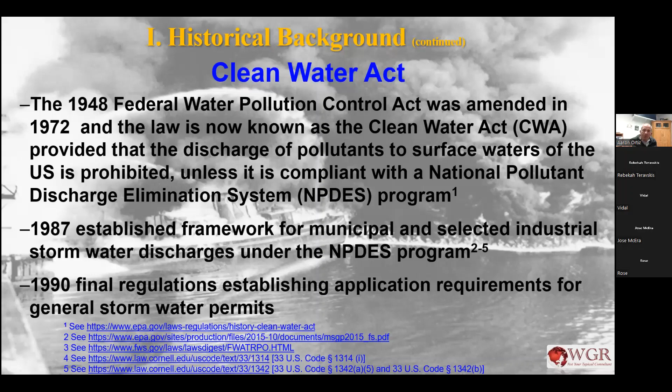If certain businesses' SIC code categorizes them as a business that needs to have coverage, you can't just let water leave. You have to put certain protections in place, and that's what this permit does. And it gives you general rules, okay? It doesn't say you specifically have to do sweeping 15 times a day or something like that. It says you have to do good housekeeping, and we'll go into that in a minute. But it gives you general rules, and from these general rules, you need to apply these, okay? And basically, the Clean Water Act allows for states to seek and get granted the ability to administer their own programs.

So that's why you say, wait a minute, this is a Clean Water Act. It's a federal Clean Water Act, but yet I'm under the California Industrial General Stormwater Permit. Why is that? Because California sought and got authority to administer the general permit program. So what we have now is a California-issued general permit that businesses that meet the criteria under the SIC code category are required to get coverage, and California has a right to administer it.

So it's a federal program, so it's a state program with federal backing, okay? And so back in '89, California received approval to administer this program. So the NPDES program created basically the permit that we're under now. And this permit requires you to create a document. So like I said, this is a general permit with general rules.

And now here's the thing that people don't understand. Many times when I see stormwater pollution prevention plans created, they basically just take the rules from the general permit, they stick them in their plan and say, here, we do good housekeeping. Well, kind of the whole point of the stormwater pollution prevention plan and monitoring plan is to say, here's how we are going to apply those general rules.

Because like I said, they don't say you have to sweep 15 times a day. They say you have to clean, you have to do good housekeeping. And then you tell them in your plan how you plan to keep that. It's a general permit, same permit for everybody. So let's get into the thing.

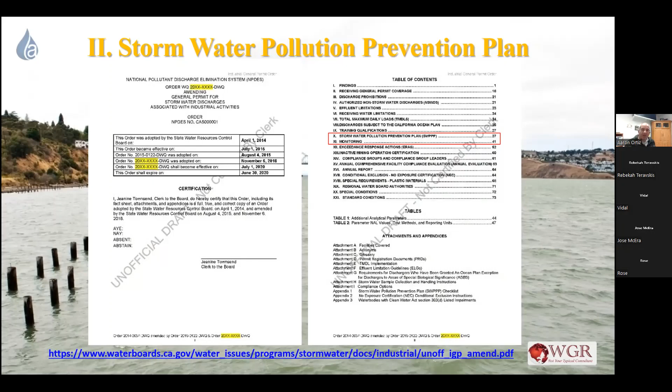But first, let's talk about what you're expected to do. So let's take a look at the first part. We're going to focus on section 10. Okay. So best management practices. If you haven't heard that term before, you will. It applies in many different sectors of business, but it's particularly important in terms of the industrial general stormwater permit, because here's the official definition as it's found in attachment C of the general permit.

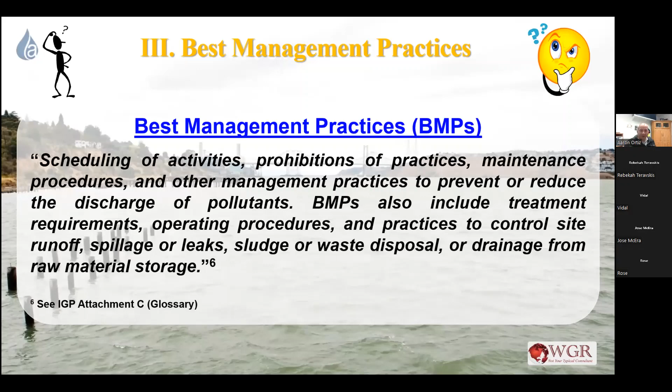Scheduling of activities, prohibitions of practices, maintenance procedures, and other management practices to prevent or reduce the discharge of pollutants. BMPs also include treatment requirements, operating procedures. You can see the rest of it. I can keep going, but I'm going to put you all to sleep. Bottom line is, I like to put things in terms that I understand. So I would put it this way.

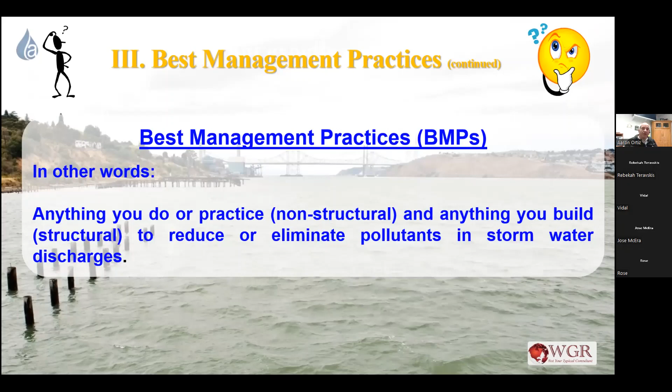BMPs, best management practices, are anything you do or practice, like non-structural, like sweeping or other kinds of practices or procedures, and anything you build to reduce or eliminate pollutants in stormwater discharges. Bottom line, very broad term. So if you have a procedure for how you fuel your vehicles that keeps that from hitting the ground, that's a BMP. If you build a cover to keep water from hitting something, that's a BMP. Very broad term, okay?

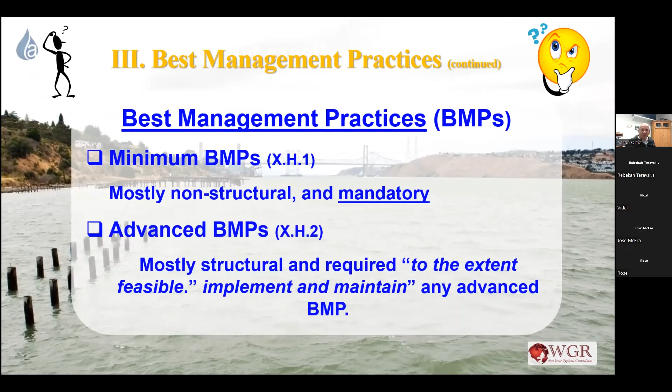So what kind of BMPs does this permit require? The one that came out in 2015 and then was revised, and the amendments became effective as of July 1st, 2020. You have the minimum BMPs, most of which are non-structural, and you're required to apply those to the extent feasible. And then you have advanced BMPs. Those are the structural ones, again, to the extent feasible. And let's take a look. Minimum BMPs consist mostly of non-structural practices under the general permit that are required to be applied to each facility.

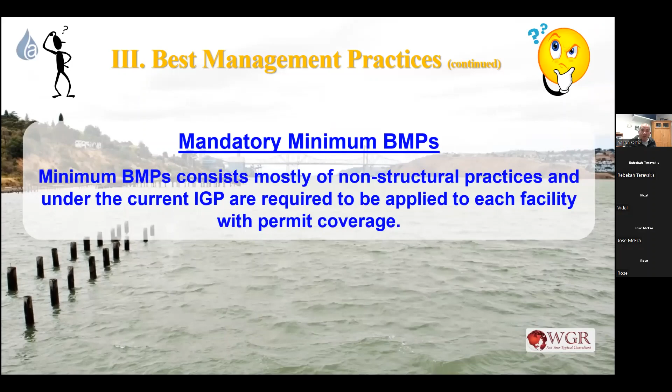So you have to apply them to a certain degree. Again, that's what your SWPPP does. Your SWPPP tells people how you intend to apply these things to your facility. Okay? And I use the term extent feasible, so I think we should define that just a little bit.

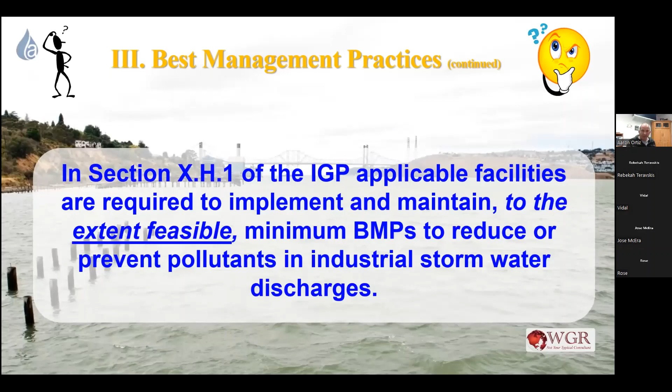It requires that you implement and maintain to the extent feasible minimum BMPs to reduce or prevent pollutants in industrial stormwater discharges, as well as the advanced BMPs, but right now we're talking about minimum. Basically, to the extent feasible means requiring dischargers to select, design, install and implement BMPs that reduce or prevent discharges of pollutants in stormwater discharge in a manner that reflects best industry practice, considering technological availability and economic practicability and achievability.

So, in other words, what's feasible for one company may not be feasible for another. And here's where your SWPPP comes into place, your stormwater pollution prevention plan. Because you can say, well, for this company, this may be feasible, but it may not be feasible for us. And if you want to make the argument, you need to make it in your SWPPP.

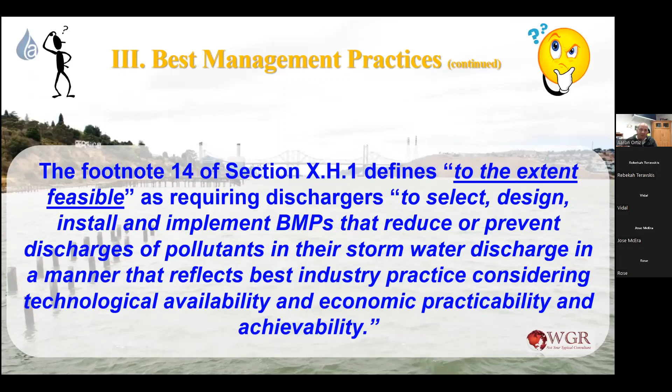So how you implement the minimum BMPs needs to match what your industry in general is doing and be technologically and economically achievable, okay, available and achievable. So they're not asking you to have a starship come down from outer space and clean your stormwater. That's not technologically achievable.

But you can sweep, you can put berms up, you can perhaps put water through an absorbent channel, or you perhaps can do more. You can cover some areas. You can do practices that don't just spill stuff all over the floor that runs off and goes down the storm drain. There are things that you can do that don't cost you a great amount of money, but yet are very effective.

So let's talk about what many people consider to be the most effective BMP, and that's good housekeeping. Here's the definition as spelled out in the general permit. Observe all outside industrial areas, including potential pollutants from offsite sources, for anything that might affect stormwater discharges, to determine how best to clean the areas. Okay, so again, they're not saying you have to sweep 15 times. It says you need to keep the place clean.

Whether you do sweeping or power washing, as long as you capture and dispose of that wastewater properly, what matters is you've got to apply this. And again, that's what your stormwater pollution plan does. It doesn't say, hey, let's carbon copy stuff from the permit and stick it in our plan. There we have it. No. A lot of these plans say, we do good housekeeping. Well, how? Well, we do good housekeeping. How? Well, that's what you're supposed to say.

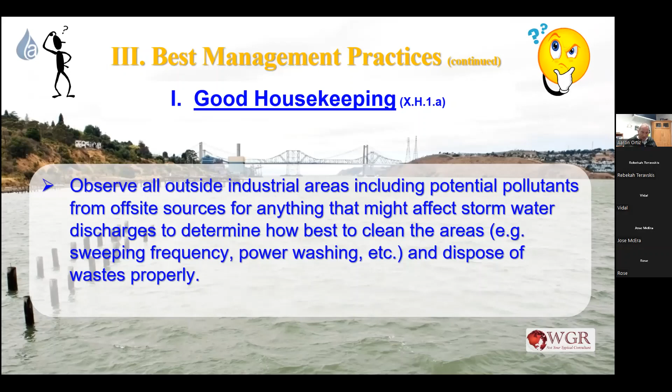Minimize track out, so keep stuff from inside from getting outside. Minimize dust generation. Try to keep dust down. People say everything's covered, but yet they cut stuff or do stuff that creates these plumes of smoke and materials that float outside in the open, settle on the ground, and then wash down the storm drain. Okay? Make sure your exposed equipment or vehicle washing areas are clean.

So basically, if you clean areas outside, if you do any kind of washing, that area has to be clean when you're done. You can't just leave. You can't just wash it and say, well, this isn't going down, it's not a discharge. Remember, as a reminder, this is a discharge permit.

If water doesn't leave your property, it's not a discharge. It has to leave your property or go into a drain that leaves your property for it to be a discharge. So if you have an area where water builds up and you capture it, and it doesn't leave, that's not a discharge. And that's critical later on, especially in Section 2; we'll talk a lot about this.

Okay, so if you have areas, for example, some people say, well, I wash my equipment, my vehicles outside, but it's on this concrete pad, it's captured, doesn't go anywhere. That might be the case, but the permit still requires that when you wash an area, when you're done, you've got to clean it up.

Because if we have some heavy storms like we experienced back in '16, '17, I know that was a very heavy stormwater year where water really came in. Areas that wouldn't normally discharge, if you have a heavy storm season, that will eventually wash off and go down the storm drain. So if you have exposed areas with vehicle washing or cleaning, you've got to clean those areas up when you're done. You can't just leave them, because the whole point is to make sure that doesn't go down the storm drain.

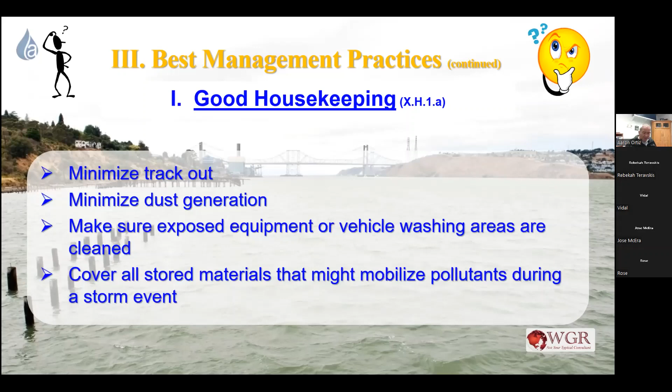Cover all stored materials that might mobilize pollutants during a storm event. That just makes sense. As a business, you want to try to keep things you use from leaving your property. Contain stored non-solid materials or wastes, particulates, powder, shredded paper, and so forth, that can be blown in the wind or washed away by the storm. So basically, the whole point of the permit, especially when 2015 came out, is they want people to think through their process. How can we, ahead of time, prepare for and keep things from going?

I have a couple of clients who have sulfur, and one uses retaining walls that are up against the prevailing wind, so that it helps to stop that. One actually has a huge containment wall all around their facility. They choose similar but different BMPs to help keep the sulfur from flying off in the wind.

Prevent wash water from getting into storm water runoff. Okay, yes, that's a BMP, but it's also an illicit discharge if you let wash water wash down the storm drain. That's an illicit discharge, and you can get in some serious problems for that.

Minimize runoff from non-industrial areas to industrial areas. Okay, the theory behind this is that where you do industrial activity, you're most likely going to have a lot more pollutants present. So what they want you to do is try to minimize areas that are non-industrial, even though I consider parking lots to be just as dirty as other places, areas that have little industrial activity, from washing through into areas that do have industrial activity, and they're worried that this water will wash stuff off and go down the storm drain. So, to the extent practicable, to the extent feasible, minimize non-industrial areas from washing through your industrial areas and adding more water runoff to that area.

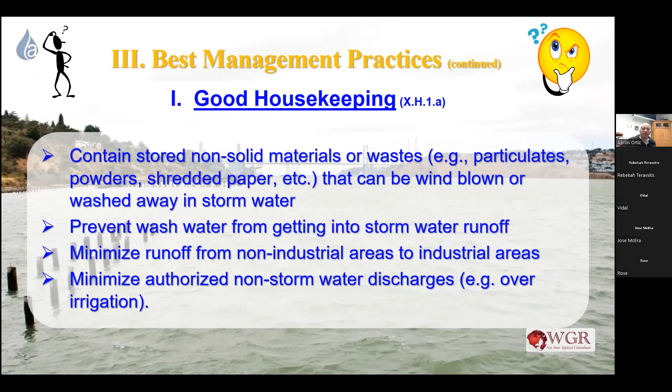Okay. I'd love to go into more detail, but I just can't because we're under a time crunch.

Identify and determine all stationary facility or mobile equipment and systems used outdoors that may spill or leak. So again, they want you to think through your program. That's kind of the whole point, that when the permit came out in 2015, they want you to try to think through your program ahead of time. So what do we have outside? What could possibly have pollutants? What can possibly cause an issue?

And when you think through that, okay, now let's determine what may cause a leak. And they're not talking about things like, well, we had an asteroid. No, we're talking about normal activity. What's feasible? What can feasibly cause an issue? So we went from good housekeeping to preventative maintenance now. That's the second of your non-structural BMPs.

Okay, now that we have the determination of what's out there, and we look at, well, what's feasible, what can cause a leak. Then they want you to perform appropriate scheduled maintenance. Okay, why? Because the theory is, if you have equipment, you want to keep it maintained, it's less likely to bust and get pollutants all over the place.

Quick example, I had a client that had a whole bunch of old forklifts. I mean, a bunch of them, and they're really old. And this former client's idea of proper maintenance was, when the hydraulic hose busts on these things, throw duct tape on it and get to it later. Okay, let's just say that's the way it felt. I'm not sure whether that's true or not, but that's the way it felt.

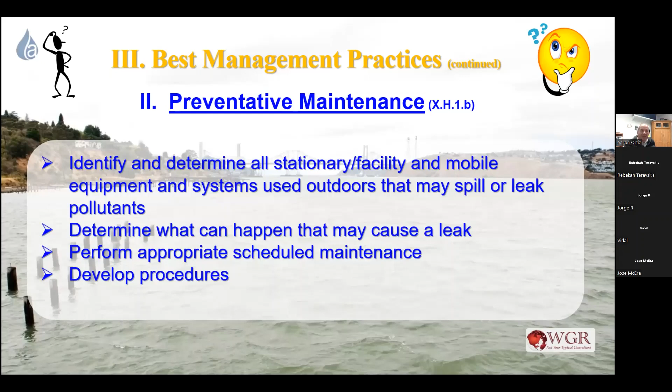So again, you see there at the bottom of the list, develop procedures. You'll see that a lot again. Think through your process, have something written down, develop procedures. Okay, spill and leak prevention and response. Okay, this is a 2-for-1 special. The first half is the optimistic side, spill and leak prevention. Okay, so how can we keep spills or leaks from happening? Develop procedures and/or controls to minimize spills and leaks.

Okay, now here comes the other half, and this is the reality section: response. Because life happens, spills happen, you do everything you can. That's why they want you to think through your program, develop procedures, try to do things to minimize spills or leaks. But then sometimes it happens. So that's why you have the second one, train appropriate staff on spill prevention and response. You'll notice the word appropriate a lot because, again, this is a general permit. They want you to think through your program and apply it as is feasible for your facility. Make sure you have appropriate spill response materials and equipment.

So I had a former client where they stored batteries in one section. They have a lot of maintenance oil in another section. So for the maintenance oil, they have tons of spill dry type stuff, kitty litter type absorbents that work really well for that section. But the stored or used batteries they're recycling, those things leak a lot, and that has sulfuric acid solution on the ground, and it's just not appropriate to use kitty litter type absorbent. So what they did was they got some different types of materials that would help to neutralize the acid and then clean it up properly.

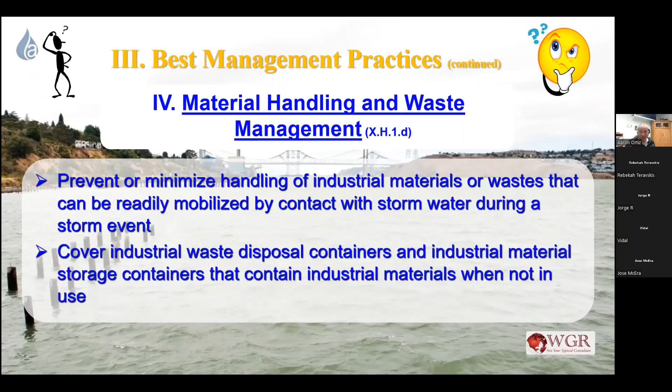Erosion and sediment control. When the 2015 permit came out, and then again revised in 2020, it put a lot more emphasis on erosion control, because I had some clients, some facilities, that are industrial but look like construction sites because they do aggregates for different construction sectors. So many times their facility looks more like an ongoing construction site than an actual industrial business. But it falls under the industrial category. So again, they want you to think through your process.

So implement effective wind and rain erosion controls. So what's effective? Well, just like with the material handling, you tell me, how do you think this is effective in keeping the wind from blowing stuff away or the rain from washing it away? Maintain effective perimeter controls and stabilize all site entrances and exits to sufficiently control discharging erodible materials. So they want you to basically walk around your site and take a look at it. Are we controlling the perimeter? Is water coming in or is it leaving?

Because basically, wherever water leaves your property, that becomes a point of discharge, or what we used to call outfalls. I use the term outfall, even though it's technically supposed to be water going to the ocean, interchangeably with point of discharge. So forgive me if I fall into that. But regardless, when you walk the perimeter, if water leaves your front gate, that's an outfall or a point of discharge. If water leaves through a section of your yard, that's an outfall. And if you have a point of discharge, you're required to collect samples when it rains during a storm. So take a look at your perimeters.

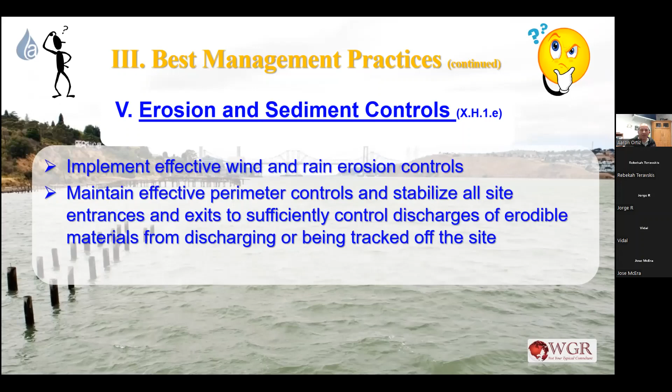Now, how you control track out, as long as it's working for you, that's what matters. Some people do rumble strips, some people have cattle gates, which are very effective type things. However it works, as long as it works, that's what matters.

Employee training program, okay? For those of you who have joined us and are joining us, congratulations, you are actually fulfilling the general permit requirement now. Pollution prevention team members, such as facility personnel or contractors implementing these various compliance groups, basically, you need to be appropriately and properly trained. The term properly was added in 2015, okay?

Okay, so again, the same, and basically they tell you, in being properly trained, some of the things that the permit lists is, well, you have to know about the BMPs, you have to know how to grab samples. That's why I broke this training up into 3 parts. So that way, all the parts that the permit requires you to have for training are going to be covered, especially in parts 1 and 2 of this training.

So as a side note, if you go to level 1 for any sampling parameter, the permit requires that your pollution prevention team be trained by a qualified industrial stormwater practitioner, a QISP, someone with my credential, okay? And we'll talk about that more in part 2. So you need to be trained, and you need to be appropriately trained and properly trained.

Quality assurance and record keeping. Develop or implement management or tracking procedures to ensure that appropriate staff implements all elements. In other words, does everybody understand what's in their SWPPP, their stormwater pollution prevention plan, and are they doing what they're expected to do? Okay.

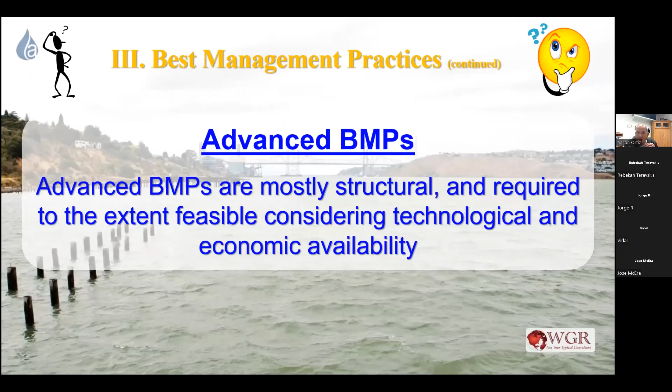Advanced BMPs are the mostly structural BMPs that are required to the extent feasible, and we talked about what they mean by that, okay? So what's feasible? Well, again, in your stormwater pollution prevention plan, you need to tell them, here's what's feasible for us to do. So 1, exposure minimization.

Exposure minimization includes things to prevent the contact of stormwater and industrial materials or industrial work areas. So roofs, storm resistant shelters, things that keep the weather from coming into contact with your materials. And this is very effective. If you can get all your industrial activity under cover, you can file for a no exposure certification, which would minimize the monitoring that you have to do.

If you can get NEC status, where all your industrial activity, that includes loading and unloading and storage, all that stuff, is under cover, then basically all you have to do is confirm annually that that status hasn't changed, and there's a much lower permit fee that goes with it. It's much less than your standard notice of intent coverage.

Stormwater containment and discharge reduction BMPs. This is one of my favorite ones. And why is that? Because containment and discharge reduction BMPs include diverting, infiltrating, percolating, reusing, or in some way containing or reducing the volume of stormwater runoff.

Okay, so basically, as you'll see in the next one, we talk about treatment control. Under this permit that we have now, if you're going to call something a treatment control, it is biologically, mechanically, or in some way cleaning water in those manners. Again, I can't go into much detail with the time we have here.

But if you can capture or even slow it down, it helps to a certain degree treat water. You may not be able to call it a treatment control because it doesn't meet that 85th percentile 24-hour storm standard that's outlined in the permit.

But yet they still say in the language, we still encourage you to do it. Why? Because a little is better than nothing at all. I have some clients where they have a couple of series of small ponds. Altogether, it doesn't meet that treatment control standard that's outlined in Section X.H.6, but it still minimizes the amount of stormwater that leaves their property. It still minimizes the amount of discharges they have.

We'll talk in Section 2 about how many stormwater samples you're supposed to collect. But many times this helps them to reduce the amount of water that actually leaves their property. It gives them a chance to capture some of it, settle out solids. Some people just having some basic treatment type style that doesn't meet the criteria, that kind of thing actually helps to clean the water to the point where their numbers are really, really good.

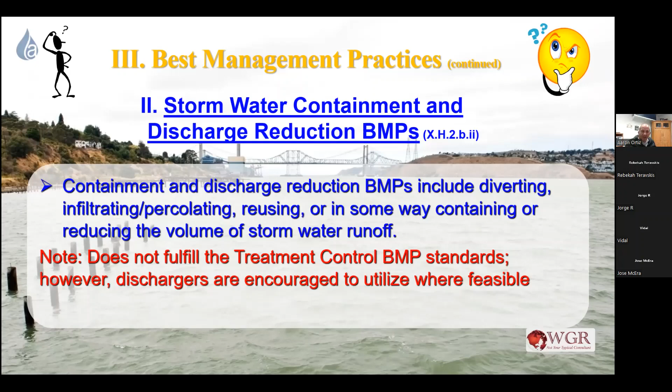So that's why the Water Board realizes if you can't put in a treatment control as outlined in Section 10H6, feel free. In fact, they encourage you to do something because something is better than nothing. And we found that many times just running water over a vegetative area, besides helping to reduce the number of discharges, also helps to keep the water cleaner.

So now let's talk about treatment controls. Treatment control BMPs include putting into place controls that mechanically, chemically, or biologically treat stormwater. Okay. For a BMP to be considered a treatment control BMP, it must meet the design storm standards outlined in Section 10H6 of the general permit. So one thing I like about this is I don't have to be an engineer, because they expect an engineer to be the one to certify this.

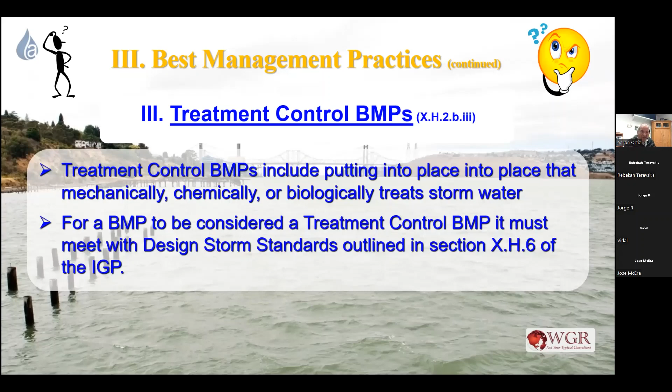So if a client wants to put in a BMP, say they put in a pond, I said, okay, if you could build a pond to this standard, you really need to do that, because it will really help in terms of a response, especially if you go to a level 1 or level 2, and we'll talk about that in the next one. But basically, if you go to level 2, the permit expects you to do more than just extra sweeping. They want you to do more to try to control that.

So the BMP must be certified by a California licensed professional engineer in accordance with, and then they have the references. So the good thing about a treatment control BMP is if someone builds something to meet that criteria standard, I'm not the one that makes that judgment call. In fact, not even the client, it's the engineer that says this treatment control BMP meets this standard. And once you have the certification from the professional engineer, then you can put in your plan that yes, this is a treatment control BMP.

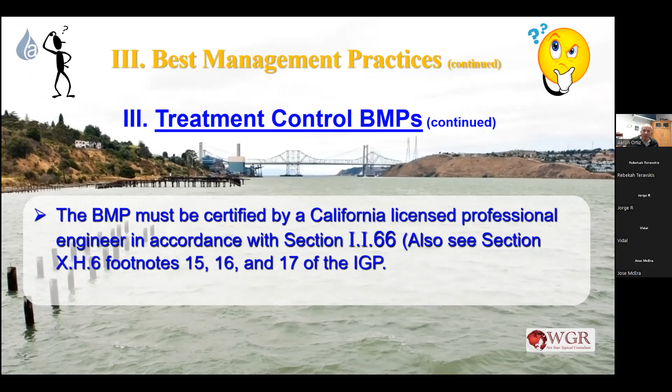And finally, boy, we really flew through this faster than I expected. If you have any additional BMPs not described, for example, what would be an other advanced BMP? Well, a lot of our clients use a product called Filtrexx. It's a compost media material used to filter stormwater. It doesn't meet that 85th percentile 24-hour storm criteria, but it does do a certain amount of filtration and filtering out of solids. So that would be in the other category, things that don't quite fit in the categories mentioned above.

So it looks like I raced through this really fast, and we're coming up to the end of the slides. So Rebekah, do we have any chat questions we can address?